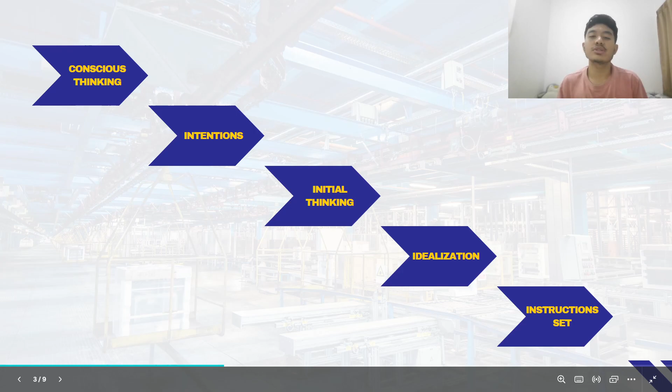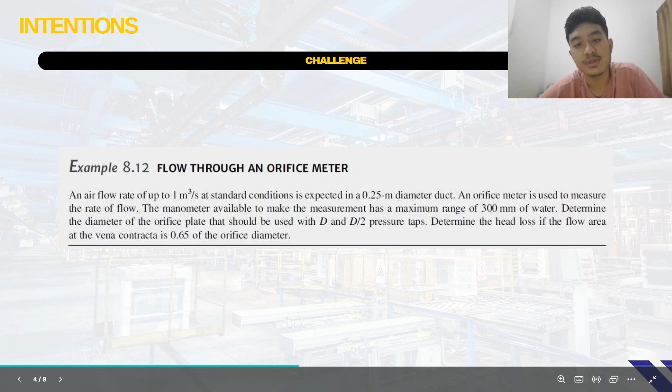So this is the framework of DAI5. We use conscious thinking, and then intentions, initial thinking, idealization, and instruction set to solve the question. On the intentions part, the challenge is this. It is a flow through an orifice meter, with an air flow rate up to 1 cubic meter per second, and there's a manometer there. We have to determine the head loss if the flow area at the vena contracta is 0.65 of the orifice diameter. So this is the prayer.

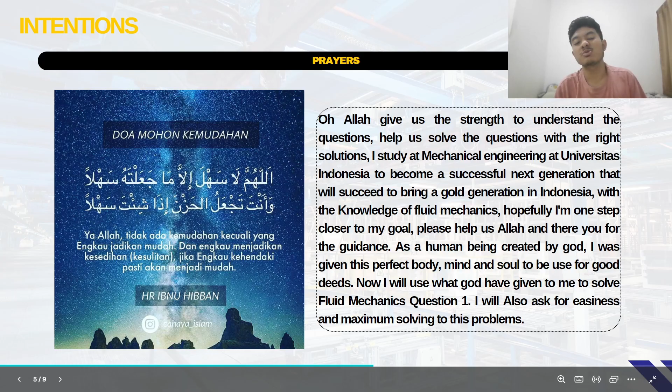So for question number 1, the initial thinking part. From the question, the topic is flow through a duct and an orifice meter. There are a few variables that we know. Rho is 1.23, the mu coefficient is 1.46 times 10 to the power of minus 5, diameter 1 is 0.25, Q is 1, the orifice coefficient is 0.625, and the range is 0.30.

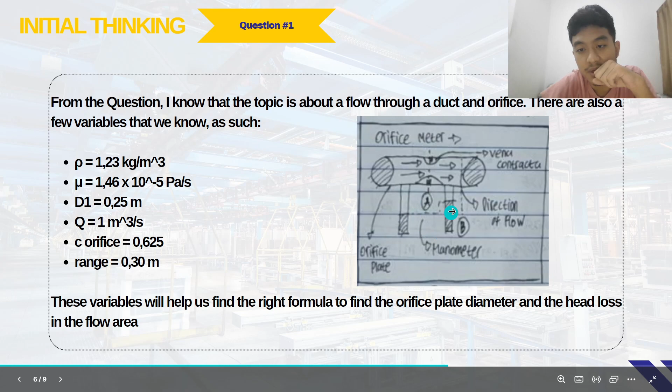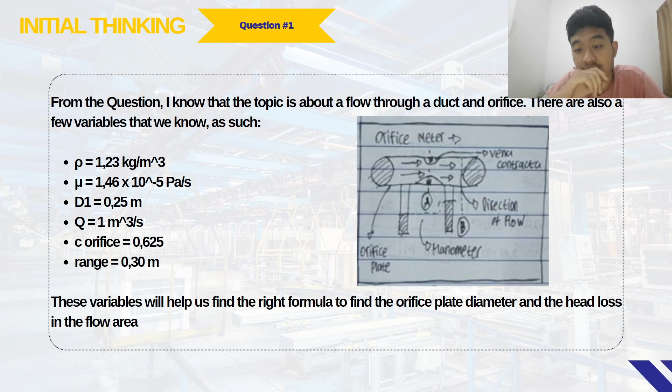As you can see here, I already drew the orifice meter. This is the vena contracta, which, as stated in the question, will be contracted to 0.65. We have to find the head loss. This is the direction of flow, flowing right. This is the orifice plate, and this is the manometer, with two tubes that contain water. Basically it's quite like a venturi pipe. These variables will help us find the right formula to find the orifice plate diameter and the head loss in the flow area. That's all for the initial thinking part.

We will go to the idealization part. For the governing equations, we have 4 equations: the M, the flow rate equation, the pressure, the Reynolds number, and also the height. After we know all the variables we need, we can count the head loss using a basic Bernoulli equation, a height equation, a force equation, and also a pressure equation.

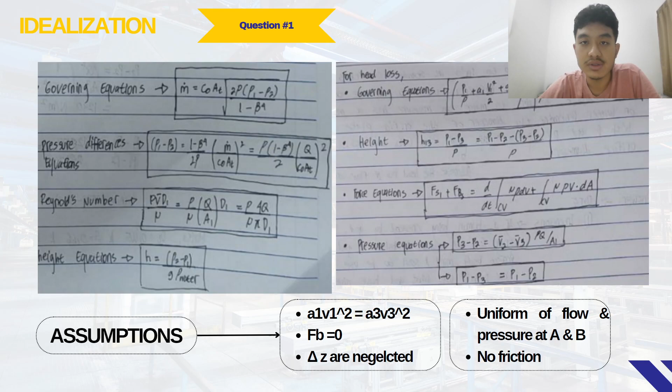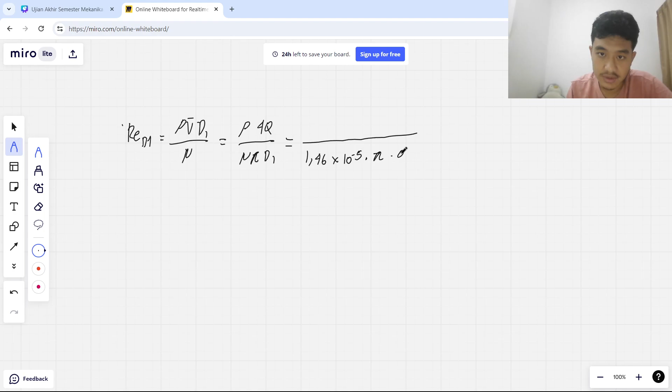So from here, it's quite laggy, I think, but it's okay. The mu is 1.46. I actually have a paper under me, so I know all the variables, so it is easier to explain to you guys. Times 10 to the minus 5, then the pi, just write pi, and 0.25 meters. After that, we write the rho, which is 1.23, times 4 and times 1.

From here we do an equation. You can just calculate it, because this is not a fixed number, so it's hard to count right now. I already did my counting, and the total is 3.5 times. So we already know the Reynolds number. After that, we will use the pressure difference equation.

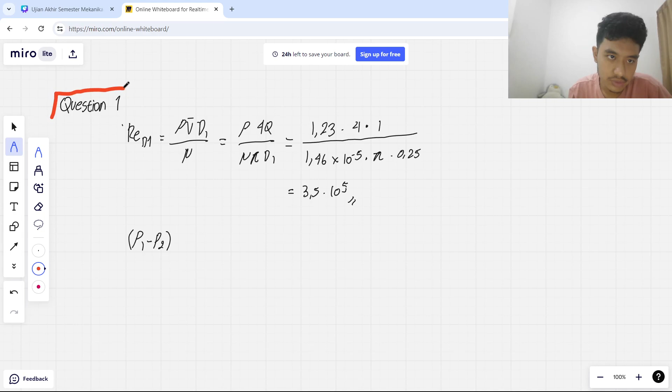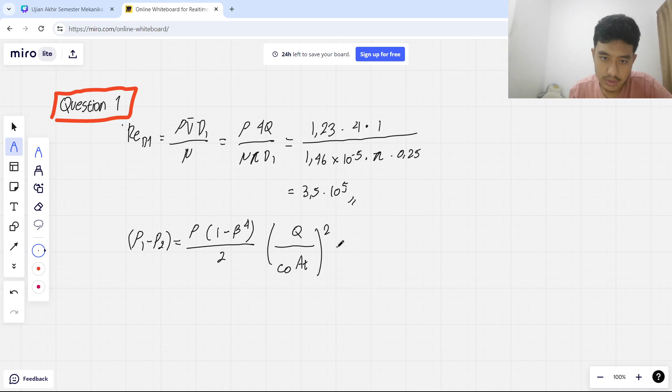So we can substitute all the numbers now: 1.23, 1 minus 0.74, times 0.625 times pi times 0.175 squared. This is we have one. I already done the counting for this part, so you can just write it here. 2070 pascals, yep, that's about it.

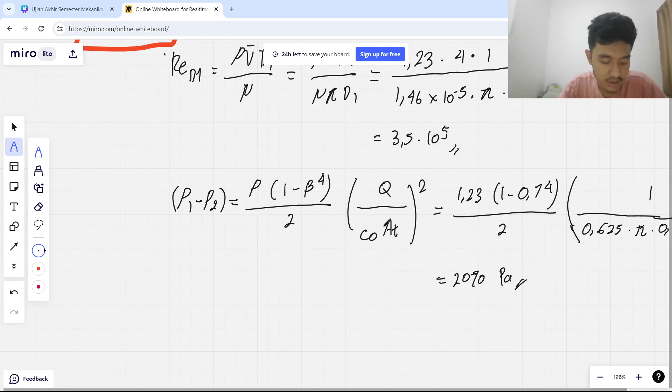And then the last one we will use the height equations formula, so we will get all the things that we need to count the head loss.

So this is 9.81 for gravity times 998. So rho water, you can just search it on Google, rho water is about this. And this is 2070. So the result, I already have my counting also, is about 0.211 meters. If you want to put it in millimeters, it's fine. So it's about like this.

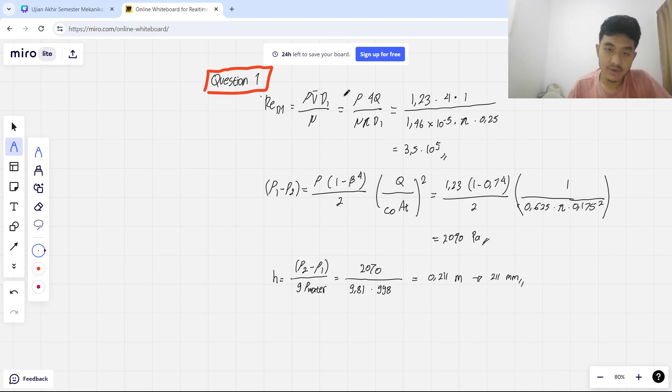From there we know from the manometer that P1 minus P2 is about 4530 pascals, and its height is about 463 millimeters, or 0.463 meters. So this is important, this is important.

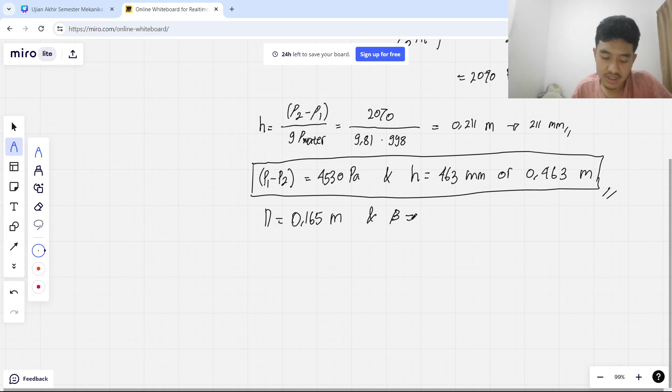If that is important, and also from that we can know that the final diameter of the orifice meter is equal to 0.165 meter, and beta is 0.66. So this is also important to be noted, so we can do our next job.

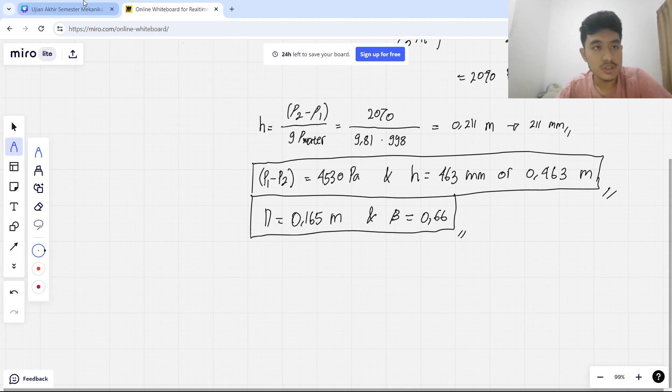So we will get to the second part. We will try, because we already know all the variables that we did, we can now find the head loss. I will try to find a way to make it more - I think I'll put it right beside it.

So for the head loss, this is the head loss equation. First we can put - use these governing equations there. So I will write it down for you guys.

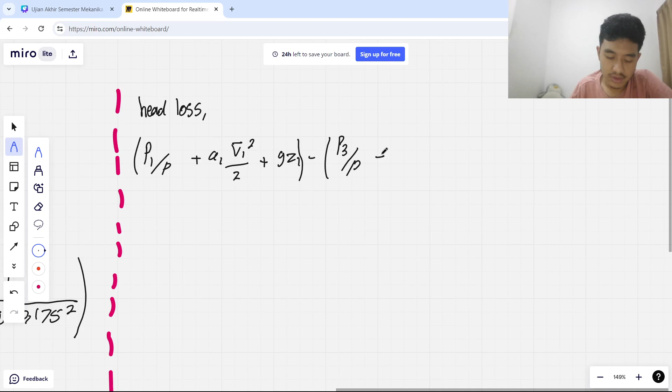Pressure 1, V plus a one velocity, plus minus pressure 3, P3, plus GZ3, equal to the height. So we'll learn the height.

And from there we know that this, this, and this can be eliminated, because the assumption is uniform flow and pressure, so there's no difference. And here we know that it's equal, so we can just get rid of it.

So the equation will be like P1 minus P3. So the equation will be like this, more or less, and then from here we can change it to this height equation, from this to this.

So from there we know that P1 minus P2 minus P3 minus P2, divided by - it's very laggy right here - height LT. So we already know the pressure equation, right?

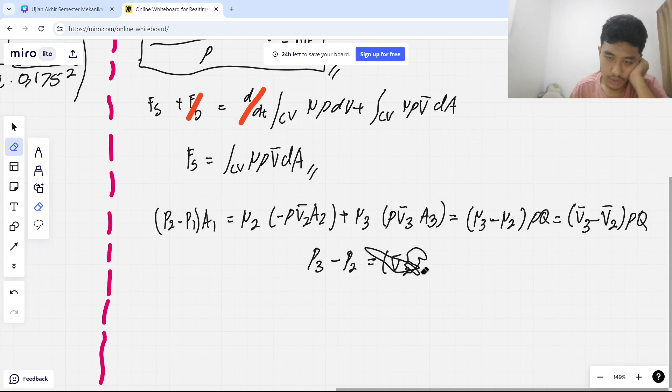Oh no, it's very laggy. It's quite laggy, I'm sorry guys.

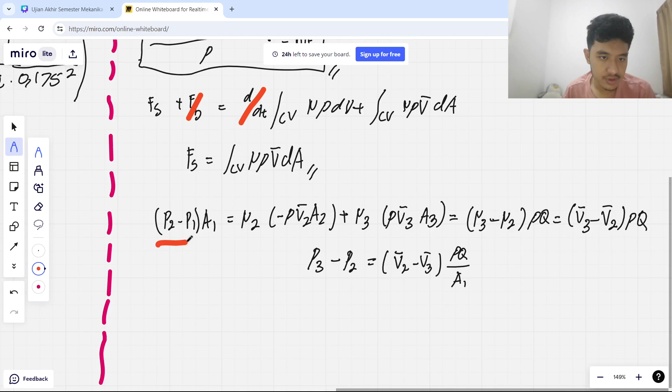So we will use this and this formula. From that formula, we know that - I might circle it. So we will use this formula and this. From there we know that this is this, and then we can rearrange it again.

So it's V2, A2, so it's Q, 0.65 beta squared, A1. So this is important.

Then we can substitute all of it - I think we'll go more to the right. So this is pressure 3 minus pressure 2 is equal to rho Q squared over A1 squared, 1 over 0.65 beta squared minus 1. So basically it's 1.23 - oh no, it's only right here.

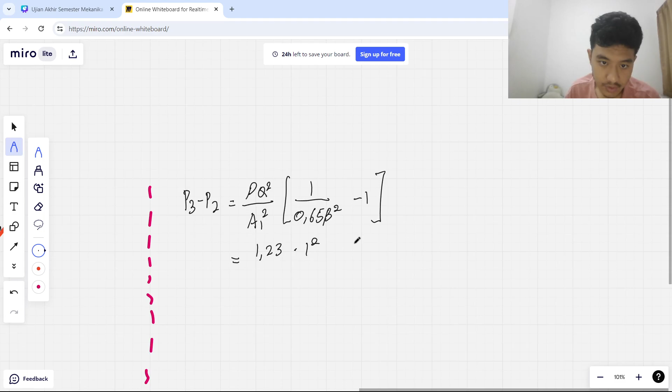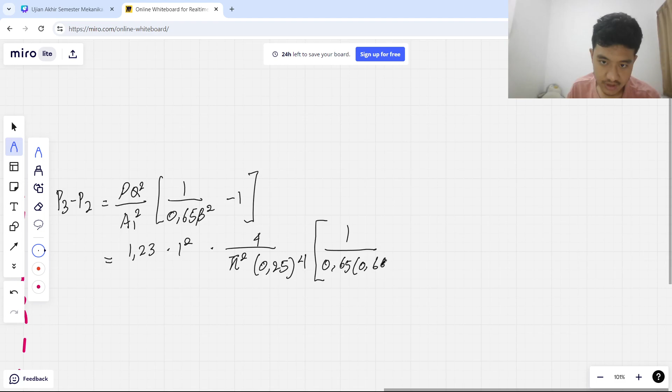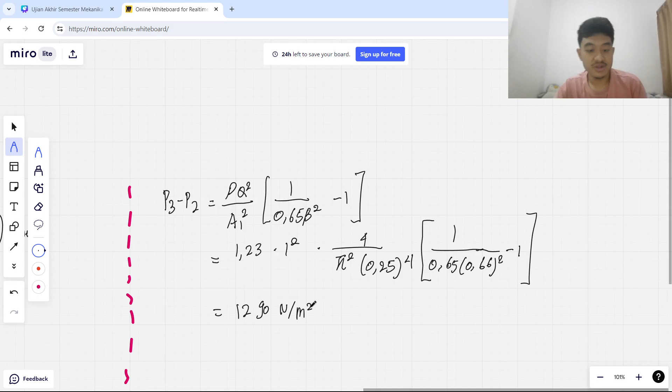So if I recall my counting also, the total pressure difference is about 1290 Newton per square meter. So from that, we can use this - where is this - to find the head loss. So we will just substitute. So height of T is - you can use this or this one or this one, I think it's easier to use this one.

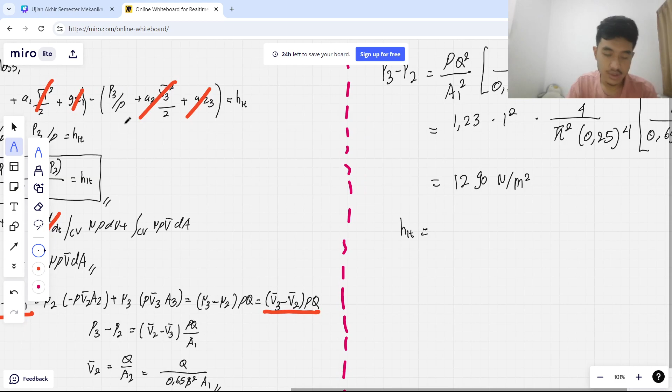So basically, we know that pressure one is 2830 minus 1290 for the second pressure, for the third pressure. So divided by the rho. The rho is about 1.23, so after 1.23 - oh - 1250 Newton per square meters.

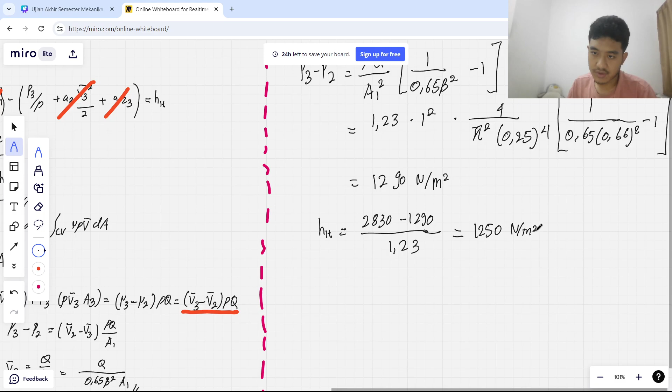So after this, we know that the head loss is about - pressure 1 minus pressure 3 divided by pressure 1 minus pressure 2. So the answer is 1250 divided by 2830, so it's about 0.437.

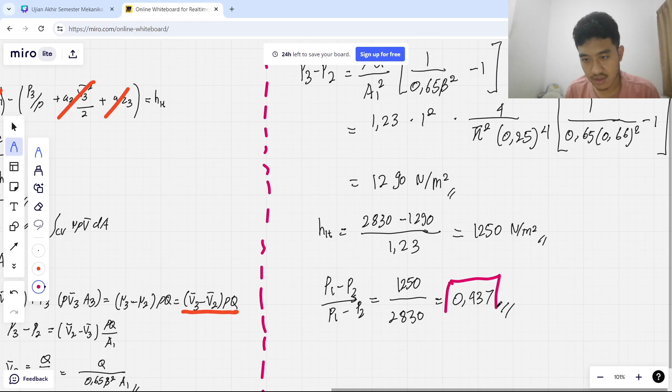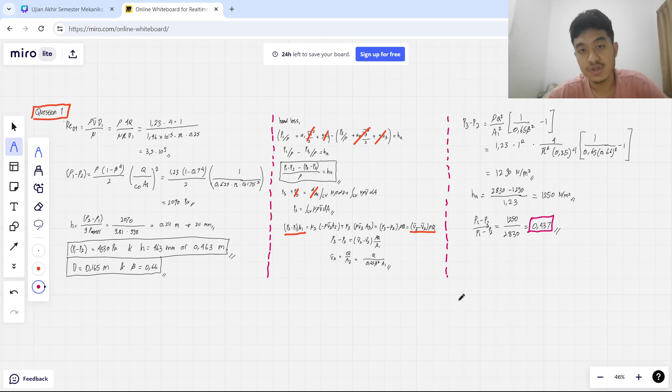And so this is the head loss. I think that's it from me for this video. So this is the answer. I will zoom out so you guys can see clearly. Sorry for the bad writing. So it's about like that. If you want it, I can screenshot it and put it at the end of the video.